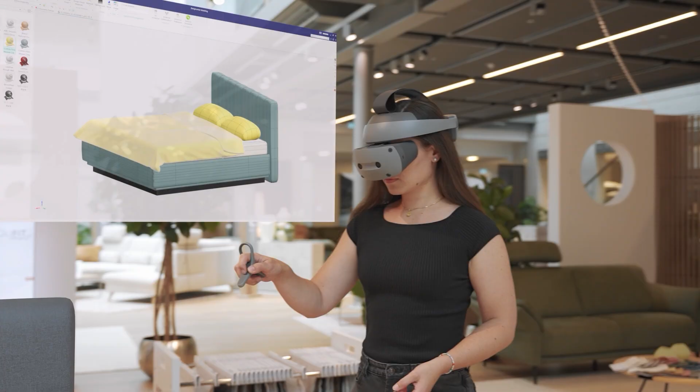Every great product starts long before it reaches the world. It starts with an idea and the tools that bring that idea to life. When these tools are simple, powerful, and a joy to use, engineers can focus on what matters most, creating the best products possible. That's why we're here.

Over the past year, we've seen a profound shift. AI has entered the engineering realm and is transforming it. And today, you'll see how we're taking that transformation even further. AI, even stronger digital thread, expanded cloud collaboration with LiveShare, and deeper immersive experiences, each building on the foundation we've created, and now coming together in ways that truly transform engineering. And today, you'll see exactly where that journey is taking us.

Let me turn things over to my colleague Drew to tell you more about how we are integrating AI into Designcenter.

Artificial intelligence is everywhere right now, and in a lot of industries, that's exciting. In engineering, it can also make you a little skeptical because here, impressive isn't the bar. The bar is: is it accurate? Is it trusted? And does it actually help engineers do better work? At Siemens, we talk about industrial AI and lifecycle intelligence, using data and intelligence across the product lifecycle to make better decisions faster. So what does that mean for Designcenter?

It means that we are not reacting to trends. It's something we've been carefully building for years, focused around amplifying the skill of the designers. AI should reduce friction, surface expertise, and help you move faster with more confidence. AI suggests, engineers decide. Let's take a quick look at how we got here because the story matters.

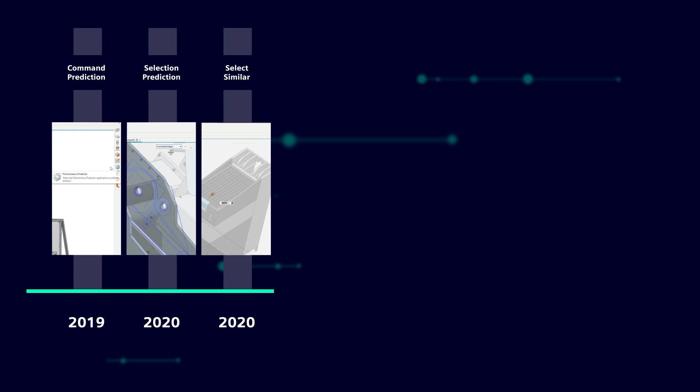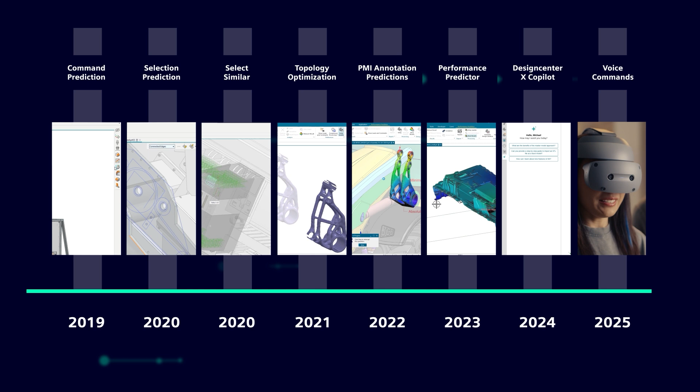Back in 2019, we pioneered AI in CAD with our award-winning command prediction, a small moment that asks you to trust the software just a bit more. And since then, we've steadily expanded proven AI capabilities across the workflow. Things like selection prediction, select similar, prediction for PMI annotation, logic editor node prediction, and even AI assistance for voice commands and performance-focused checks. Today, those AI-powered capabilities are used over 500,000 times every month. That's real time that engineers are getting back every day.

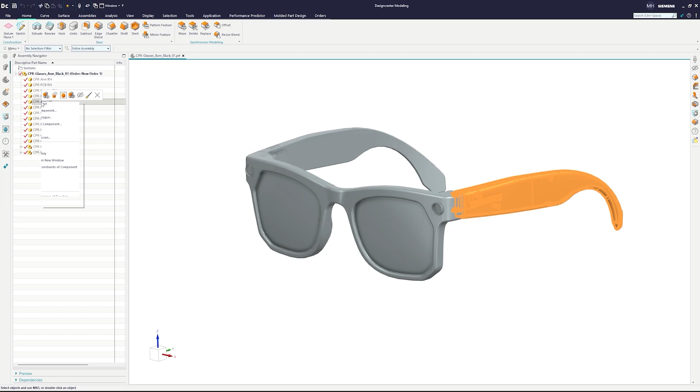And then we hit the next shift, Copilot. Because sometimes the best interface isn't another toolbar, it's asking, how do I do this? And getting an answer grounded in how Designcenter actually works. And even when generating new geometry, you'll always be in the loop. It simply means removing the busy work between your design intent and a trustworthy engineering outcome. Let me show you what that looks like in a real workflow with AI as your assistant.

I'm going to start in Copilot and ask, how do I apply a chamfer here? Great, now I run the chamfer and Designcenter predicts what I'm likely to do next, edge blend. Designcenter helps with selection prediction, anticipating the picks I'm trying to make. And when I need to grab all the similar edges, select similar makes it instant.

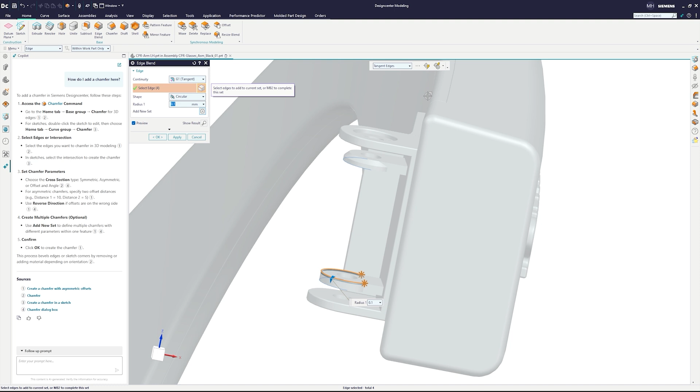Before I move on, I can run a quick performance-focused check, catch issues earlier before they become rework. And if my hands are on the mouse and model, I can even trigger commands with voice command assistant. Publish report. One workflow, 6 moments where AI simply saved time, reduced friction, or prevented mistakes. Now multiply that across an entire part, then an assembly, then an organization.

And this is where we're headed next, moving from predictive AI to agentic AI and toward generative AI built around the language of engineering. Not generic chat, domain intelligence, agents designed for specific engineering tasks with humans in control at every step. Designcenter has been an engineering AI pioneer since 2019 with a goal that remains unchanged, helping engineers design better, faster, and with more confidence.

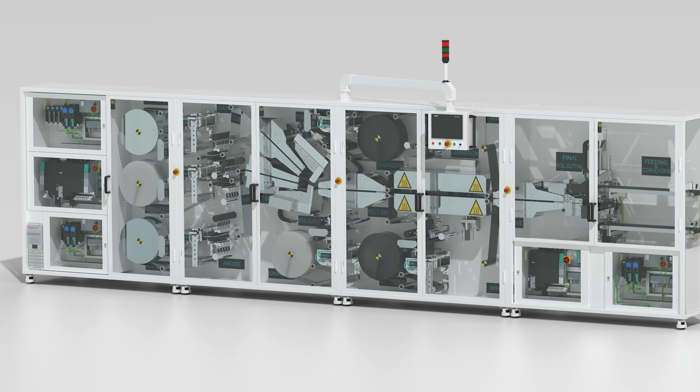With lithium-ion batteries powering everything from smartphones to electric cars, battery machines like this are vital for 21st century manufacturing. And it's a great example of how Designcenter and the Siemens Accelerator platform combine to create the most comprehensive digital twin. Every component is parametrically modeled in Designcenter down to every nut, bolt, and wire.

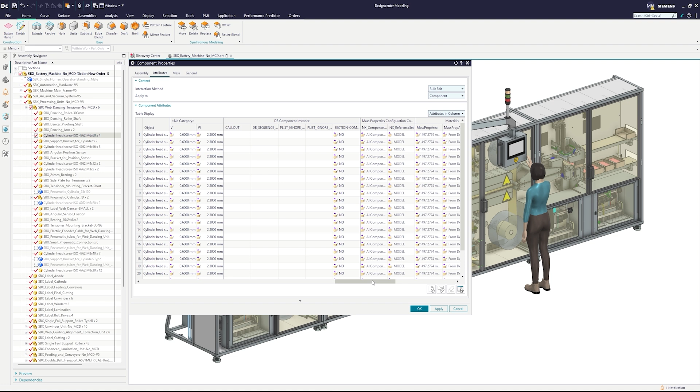Each component has mass and material properties, as well as full product manufacturing information to control manufacturing processes in NX CAM. Mechatronics Concept Designer takes that data to show us the moving parts working together with precise, physics-based simulations, either in a desktop or immersive environment.

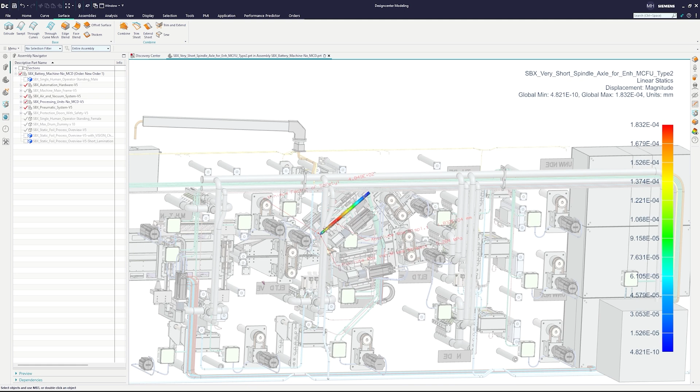Designcenter tools like Performance Predictor and CFD Designer simulate the actual performance of the components and assemblies on a mechanical, thermal, and fluid flow level. And you can seamlessly move to Simcenter for the next level of simulation precision when you need it.

None of these parts would work without the electrical systems controlling them. You can create electrical diagrams, wire harnesses, and even individual printed circuit boards, all in Designcenter. And mechanical and electrical teams are in sync thanks to the bidirectional data exchange with Capital.

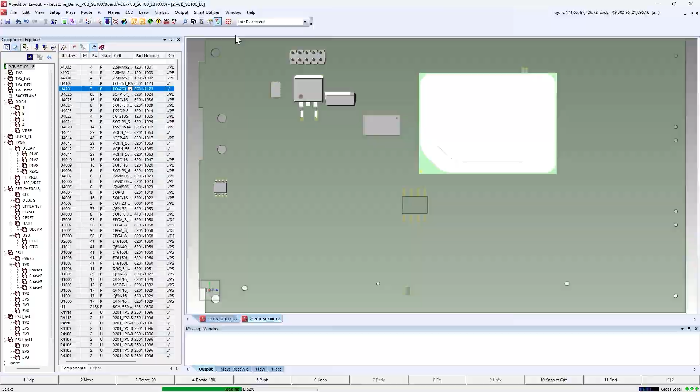Zoom out and we can even see how the battery machine integrates into factory processes created in Line Designer within a facility created with Designcenter's Building Information Management module. Pulling all this together is no mean feat.

It means a wide range of specialists working together, often across different teams and different time zones. And Designcenter's innovative cross-domain collaboration tools and cloud data management technology make it easier than ever. We don't even need to open Designcenter to get started.

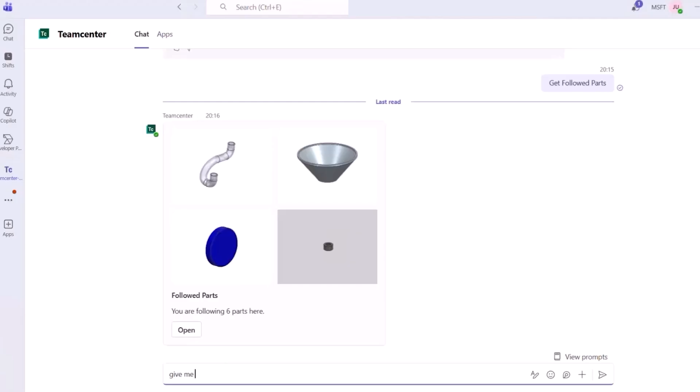Our new multi-user notifications in Microsoft Teams keep you up to date with changes to followed parts, anywhere, anytime, and on any device. You can even use natural language commands to search, filter, and query your notifications with Copilot AI. And when you're ready, you can open a part in Designcenter straight from your Teams notifications.

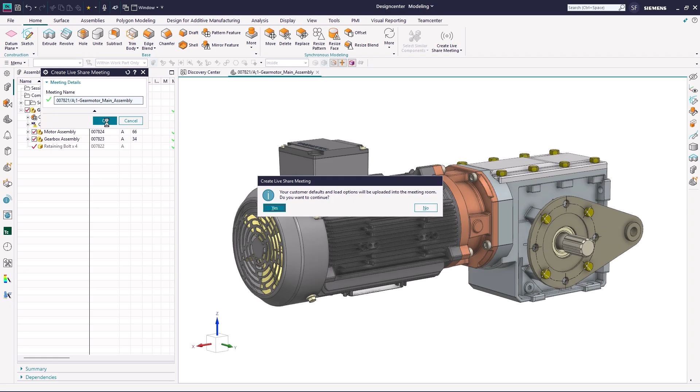Once you're in Designcenter, live share means you can work on a part at the same time as the colleagues who are sending you the change notifications. Invite them to a live share meeting, and you can all edit the same parts or assemblies simultaneously. All your changes will update automatically on each other's Designcenter sessions. All the data is managed in Teamcenter to ensure data model consistency and industry-proven security.

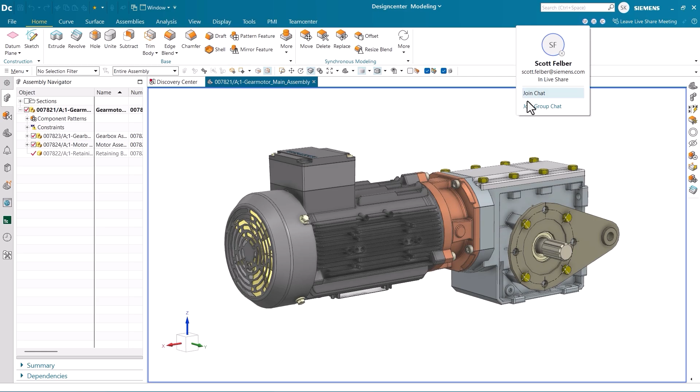It's truly synchronous engineering. You can see who else is editing a part in the top right-hand corner of the window. Click their icon and you can open a Microsoft Teams chat to talk about your edits or start a group chat to expand the discussion with everyone in the same live share meeting. Designcenter will also show you people who've checked out other parts in the same assembly, so you're aware of other work that's taking place.

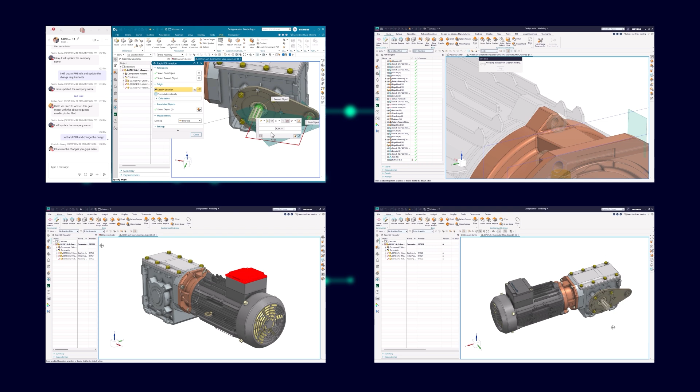Live share meetings aren't just for modeling, you can now also collaborate while authoring and managing PMI in the MBD Navigator. Synchronous engineering through live share even expands into the immersive environment, and we'll cover that in more detail later. Features like live share and multi-user notifications are only possible thanks to the deep, seamless integration between Designcenter and Teamcenter.

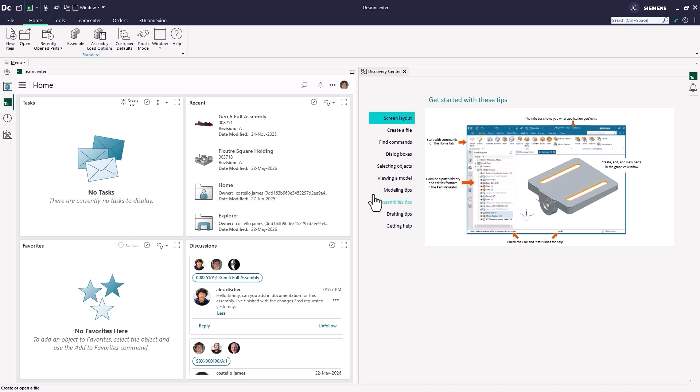Nowhere is that integration more apparent than Designcenter's built-in data management. It gives you full access to Teamcenter right inside the Designcenter CAD environment, so you can design without interruption. Find part files, read notes, make notes, do all your usual Teamcenter tasks without changing windows or switching to another application. With all the data and information you need right there in your CAD workspace, built-in data management won't just save you time, it will change the way you work altogether.

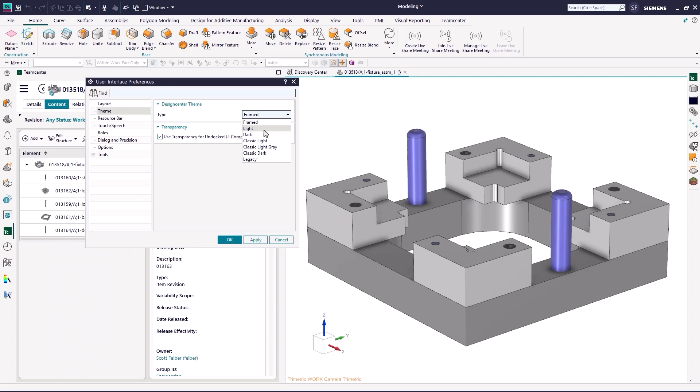We've aligned the look, feel, and interactions of Designcenter and Teamcenter, so switching between the two is as intuitive as possible. Designcenter users can get started with built-in data management right away with a familiar user interface. You'll soon find yourself switching between design and data management instantly as it becomes a natural and fluid part of your workflow. Being able to freeze and unfreeze parts directly within Designcenter is one particularly useful benefit.

Let's say you're examining an assembly and find a particular part which you think might need adjustment. Built-in data management lets you freeze that part in Teamcenter with just a few clicks, so no one else in your organization can edit it. You can unfreeze the part just as easily afterwards, and you've not left Designcenter once during the whole operation.

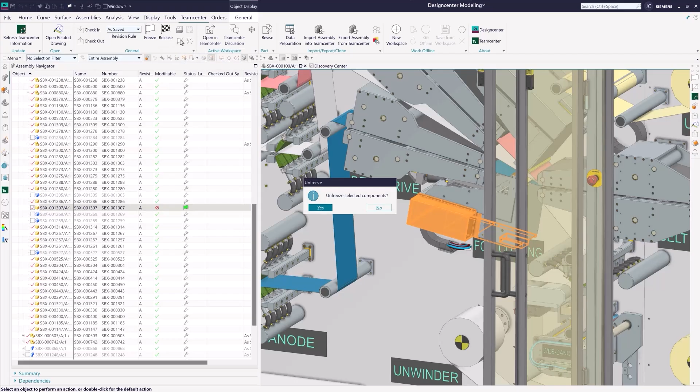Instant access to Teamcenter means instant access to all your notifications too. Keep up to date with all your followed parts without any distractions from other applications. Then, open a part straight away to see what's changed.

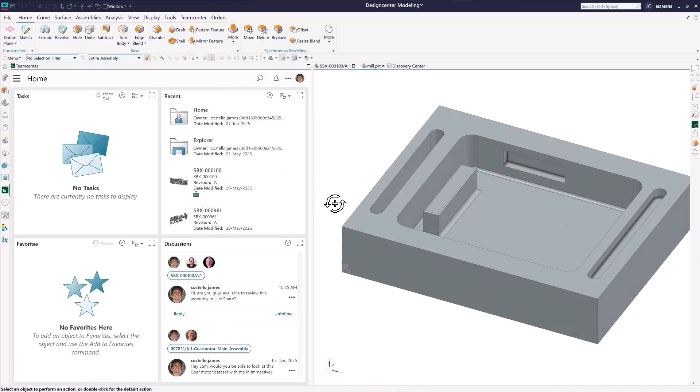It's all designed with flexibility for both managed and unmanaged data in mind. It doesn't lock you down to only working with managed data. If a partner or customer sends you a part file which isn't in your system yet, don't worry. You can still open it as usual before moving back to working with your managed data afterwards.

And opportunities for cross-domain collaboration in Designcenter don't stop there. Team Connect is an efficient and cost-effective way for your colleagues to get more value from your Designcenter data. It lets executives, managers, marketing teams, and other professionals view and visualize your products without full Designcenter engineering capabilities.

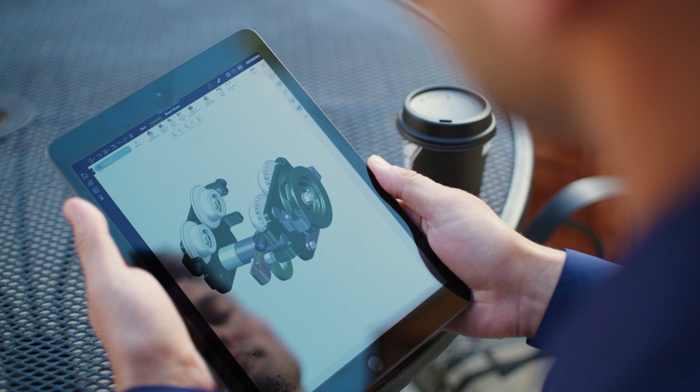With Designcenter X Essentials, colleagues across your organization can perform a huge range of design and engineering tasks in a web browser on any device from any location. It truly bridges the gap between the design studio and the shop floor. And if you like the look of that browser access, great news. It's included in all tiers of Designcenter X. So when you're away from your desk, you can continue to be productive by editing your models and drawings from a browser on any device.

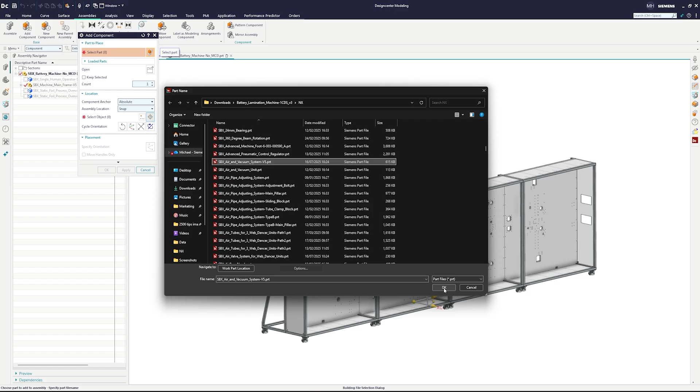So you've seen how large and complex assemblies are great for showcasing Designcenter's collaboration and data management tools. But we've also been working hard behind the scenes to speed up loading, saving, and working with this kind of data set. We've enhanced performance when adding additional sub-assemblies to an existing assembly, a change that's particularly impactful if those sub-assemblies are already large themselves. And with improved caching of component-level attributes, assemblies with these attributes now load up to 3 times faster.

It's a process of continuous improvement across software releases that adds up to significant time savings during your daily workflows. And while you'll see the biggest benefit if you use large assemblies yourself, these performance improvements really do affect everyone using Designcenter. Faster assembly loading applies across the board, however many components you're working with.

Designcenter can now also minimally load assemblies with an enhanced chunk-based solution. Breaking down large assemblies into smaller, manageable chunks during loading is so much more efficient that an assembly with 120,000 components can load 15% quicker.

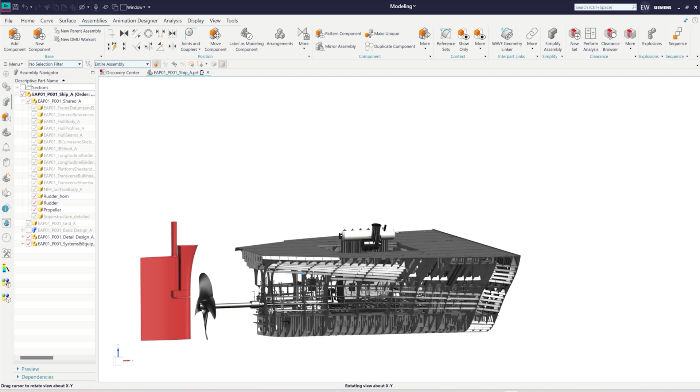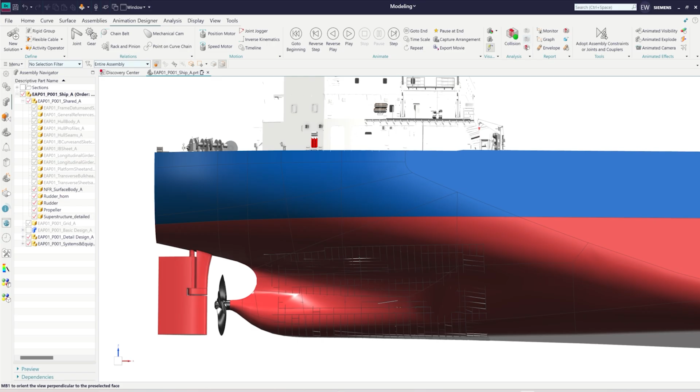Shipbuilding is one industry which benefits from these performance enhancements every day. Even though components may share identical geometry, ship assembly systems treat them as unique entities to account for their position in the ship installation procedure, lifecycle traceability, and regulatory significance. Two visually identical brackets installed in different compartments may connect to different surrounding structures, be welded using different procedures, and be installed at different stages of construction. The position of the bracket itself then becomes part of its identity. No wonder ship designers benefit so much from Designcenter's high performance with large assemblies. Their assemblies are even bigger and more complicated than they look. And what's more, Designcenter offers a dedicated solution for ship design.

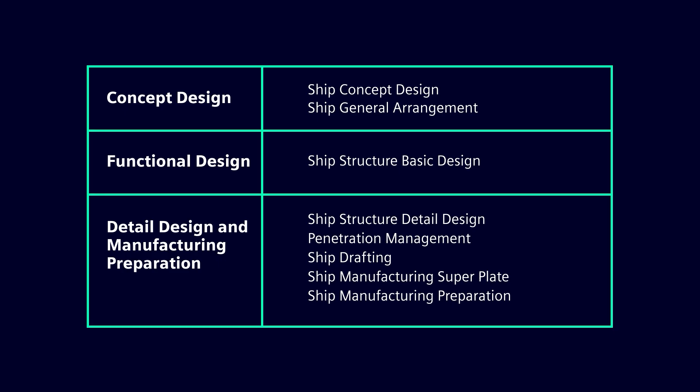You get all the right tools for the job, no compromising with generic CAD features that are ill-suited to the marine industry. It's a whole suite of add-on modules that you can access through value-based licensing. These modules give you true end-to-end coverage of ship design workflows, all in one unified platform. From initial concept design to detailed design and on to manufacturing preparation, we've worked closely with our marine clients to ensure that every step is laser focused on their unique requirements.

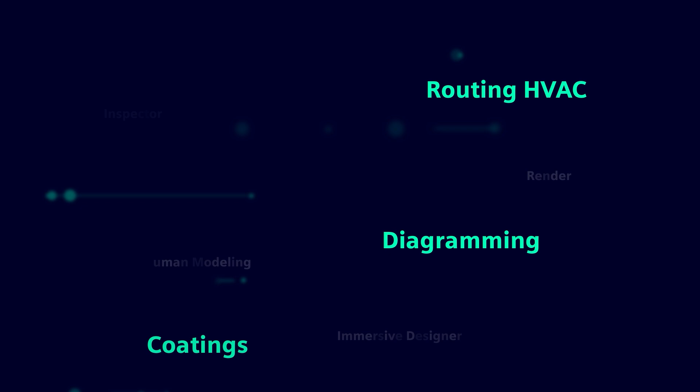And because you're using Designcenter, you'll also benefit from all the other leading add-on modules Designcenter offers. Routing to design piping, HVAC and cableways, corrosion analysis indicator to identify corrosion risk factors, structure designer for rapid rule-based parametric definition of secondary structures design. The list goes on. So, what's new for ship design in Designcenter?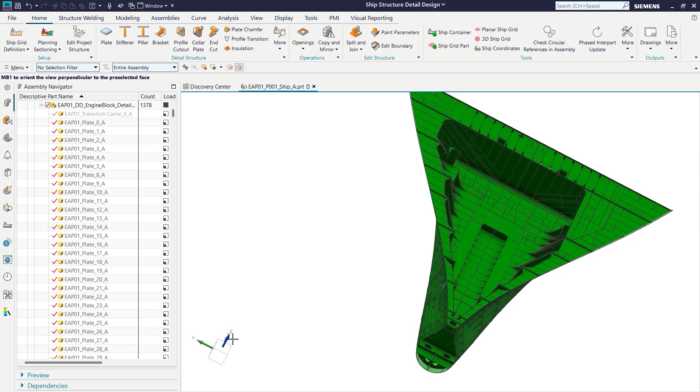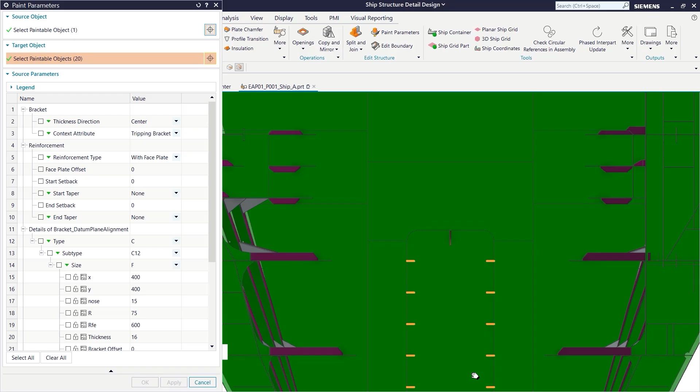First up, we have multi-part editing. This capability is critical in ship design software because ships are large, highly repetitive, and interdependent systems where a single change must be applied consistently and efficiently across many related parts. Paint parameters is one way to quickly edit parameters and non-geometric properties for multiple similar structural parts. Select a source object to get attributes such as thickness, material, and water tightness. Then, use any of Designcenter's intelligent selection tools to choose all the parts where you want to apply the parameters. Run the command and you're done.

Use paint parameters on mirrored parts and you save even more time. The AI-powered selection tools we mentioned earlier are particularly useful in a ship design context.

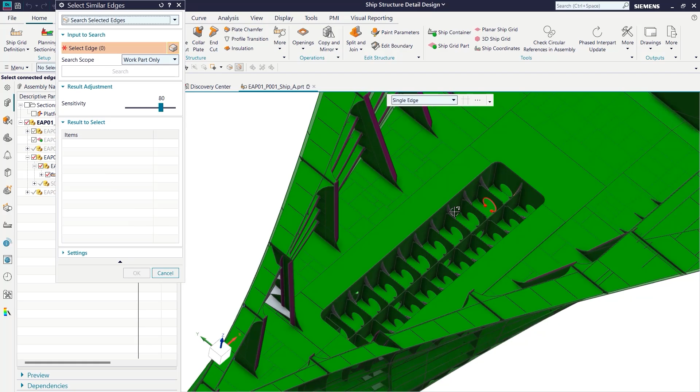In this case, we need to add an edge reinforcement to all the openings on the floor plates. You select similar edges on the correct edge on an opening. Then simply drag a box across the viewport and Designcenter will use AI to search for the same edge on all the other openings in that area. Once selected, you can run the edge reinforcement command on all the edges on every opening, creating dozens of edge reinforcement parts in just a few seconds.

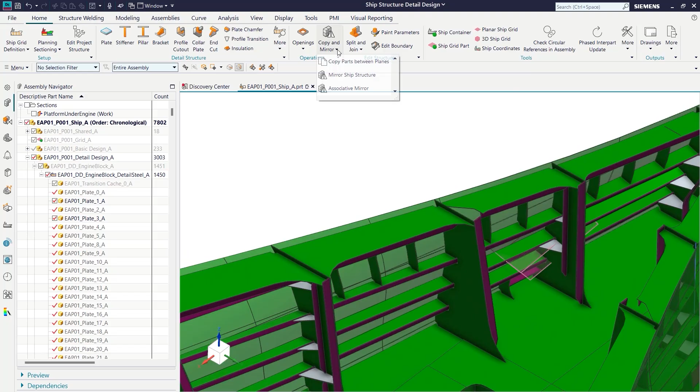Next, we'll show you how you can create an intelligent topological copy of a part that automatically adapts to its surroundings on a different plane. A bracket like this is defined as ending between two stiffeners. If we copy that bracket across to a different plane with different stiffeners, the geometry of the copy automatically updates to match. It means you don't have to create new brackets from scratch every time or edit something that you duplicated which doesn't fit. Simply define your parts well and Designcenter does the rest. Extrapolate these workflows across an entire hull design and you can imagine the time savings.

This really is just scratching the surface and there's so much more exciting new ship design functionality to discover. Make sure you keep up to date with the Designcenter blog for all the latest.

Now, let's hand over to Aziz and the immersive engineering team to learn more about the new enhancements they've been developing.

If you followed our What's New videos, you'll have seen the power of immersive engineering before. So this time, a few of us from the immersive team have got together to give you the inside track on the new features and enhancements, which we've developed for the June 2026 release.

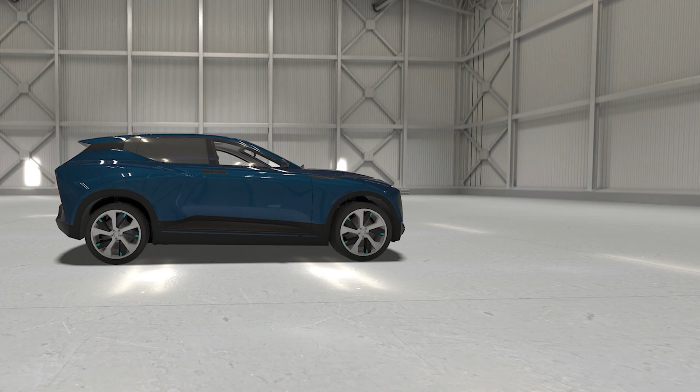Recently, we've introduced some new performance improvements to the Immersive Designer application. We've also introduced some changes to the way we build geometry. When we introduce larger assemblies, which previously may have struggled with memory consumption, we're now able to cache some of that geometry that comes in and reuse it later down the line, which helps, in effect, reduce memory consumption as well as improve the runtime performance, including frames per second and responsiveness.

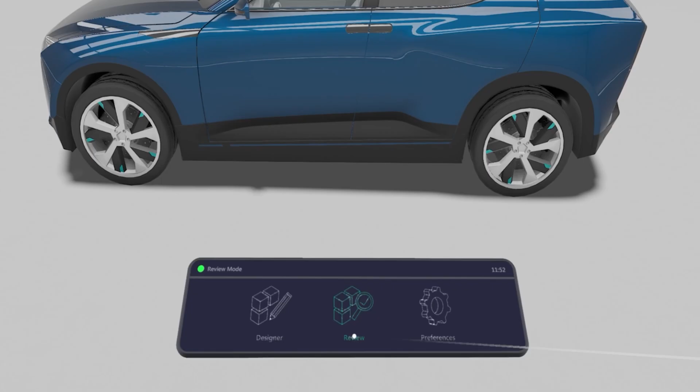We've also optimized how components move, so it's faster to reposition parts in an assembly, and animations from Mechatronics Concept Designer display more smoothly. Refinements to the user experience continue to make interactions quicker and easier, especially if you're using the dedicated Sony head-mounted display and controllers.

We've introduced support for gamepad controllers to be able to navigate immersive scenes, and this can be used in desktop mode with our walkthrough functionality, or this can also be used to navigate with a VR headset connected. Now you can upload your own custom scenes to the virtual reality side of immersive.

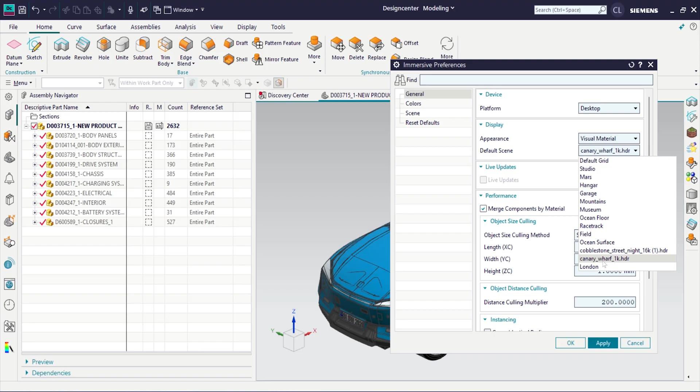Customers would choose to use custom HDR scenes, say if they've got their own environment that they want to see their specific CAD data in, like their own office, or even if they have their own customers that have provided them with HDRs. Now you can exactly see your CAD data in those environments.

We've added even more ready-made scenes to choose from as well, and switching between scenes is now much faster. Support for Sony Clear Vision unlocks the full potential of the head-mounted display to show off your models in the precision of true 4K.

We actually render the scene at much higher detail, but only in a small area, and the outside of that area is done at a lower resolution. The main benefit is that smaller area is much higher resolution, and paired with the eye tracking of the Sony headset, it means that no matter where you look, you will see much clearer.

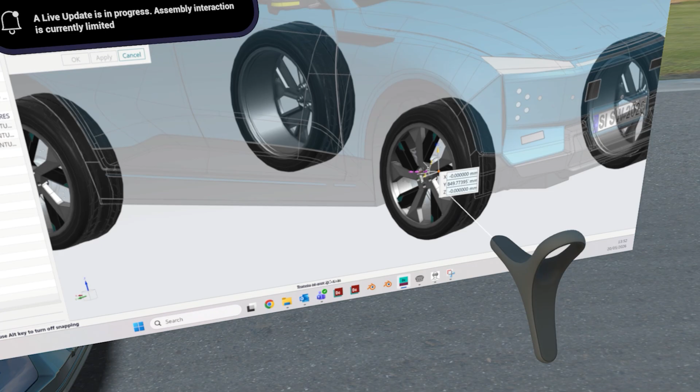One of the biggest recent enhancements for Immersive Collaborator has been the introduction of live updates. Any design changes made by the meeting host update in real time on the model in the immersive environment for everyone to see. And now these live updates also expand to any changes made by colleagues collaborating in a live share meeting too. There's no need for any menus or loading bars. The change you make in your CAD application comes through and streams really responsively into your immersive application.

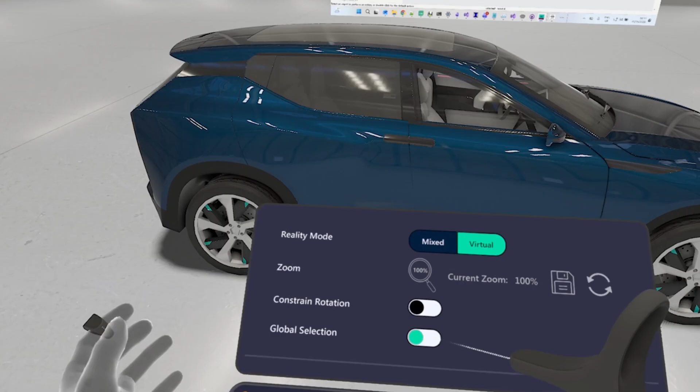Another update that further integrates the desktop and immersive experience is global selection. Select a part with your controller, and Immersive Designer and Designcenter will select it in your desktop viewport too, and vice versa. If you've got a selection intent of body edges, for example, and you're in your immersive experience, you can get immediate feedback on what you're about to select.

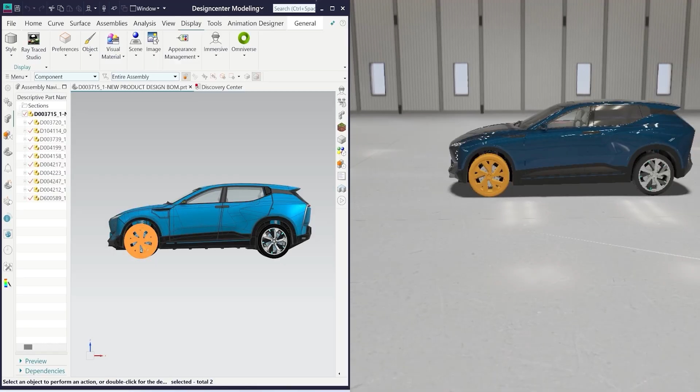You'll see an edge highlight in the immersive application, and then in Designcenter, when you actually do that, the selection is processed as it would be before, and then you'd see the body edges in the immersive experience.

Immersive meetings now have a new option to run a tour-guided session. The host keeps all their usual functionality, while guests get a more streamlined experience so they can focus on design review. So being able to take a group of people and lead them through scenes.

You could have 40 people, each from a different country, all coming together in our VR space and being able to talk to each other, design together, and then having a host take them through what needs to be done.

We went away and designed a feature called Viewpoints, which allows the setup of a few teleport points. You set a list of points where you want to go, and it plays through like a slideshow. They can be a real time saver for navigation and let hosts give their meetings a more refined presentation.

Industries, I think, waste a lot of time building prototypes. With immersive engineering, you can build your prototypes in Designcenter, and with one click, you can view all of that inside the immersive environment without having to build anything physically.

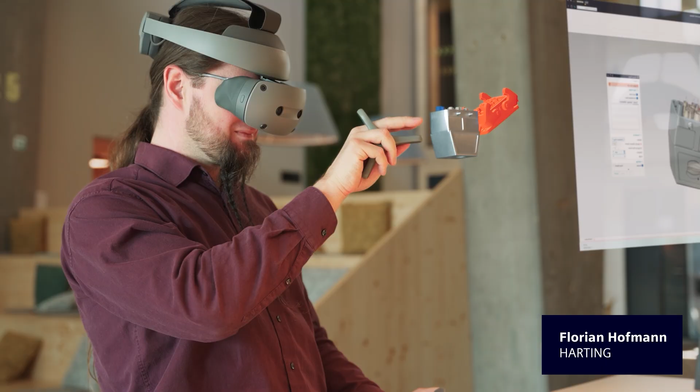If someone had never touched immersive engineering before, I would say step into the future. Immersive engineering excels in the collaborative space. Just being able to share an assembly worldwide is such a huge win.

I'm not working with my mouse and keyboard and just typing in some numbers. I built furniture before with my hands, and now I have the opportunity to create it in future with my hands. It removes the ambiguity in terms of what they think might work or we think might work, and they look at it, they pin it, and they say yes, yes, yes, yes, no, no, no.

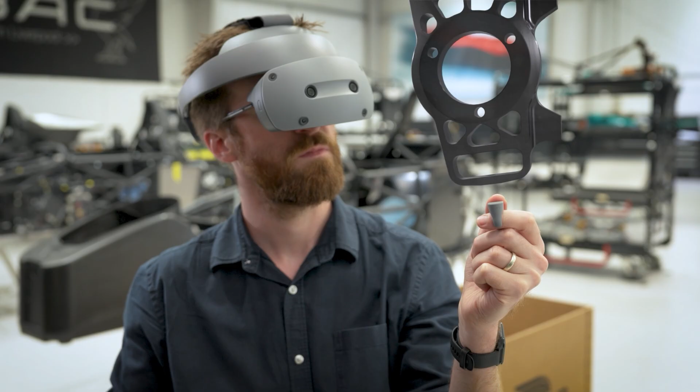From a production capacity standpoint, the time to product from the design review to actually being able to implement a sign-off and start the production manufacturing process has basically shortened down almost exponentially.

So Siemens is not just a partner, we call them an innovation partner because we innovate together. Siemens is actually our oldest partner. When we started in Formula One back in 2005, Siemens was there, and they've been with us every single step of the way.

Designcenter is evolving into something more than software. It's becoming a space where engineers think, create, and collaborate with unprecedented clarity and confidence. Whether you're refining a single part, exploring an immersive review, or working live with teammates from around the world, Designcenter is for everyone, and we can't wait to see what you do with it.